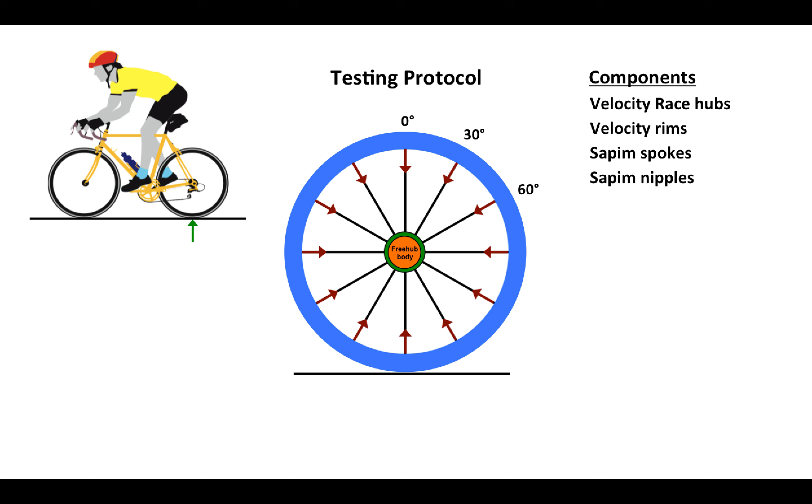On the left, you see a sample of a wheel. We're looking at the wheel on the drive side, and we have to have a way of referring to the positions of the spokes. Starting at the top of the wheel, which we will consider to be 0 degrees, then we can label every spoke every 30 degrees.

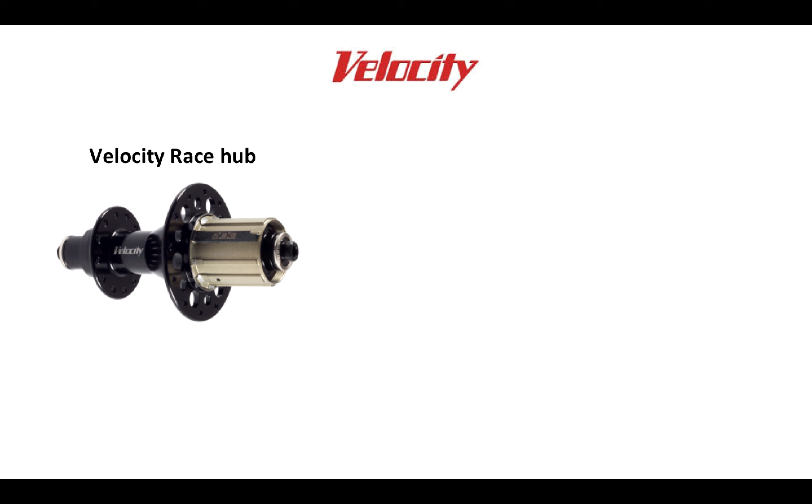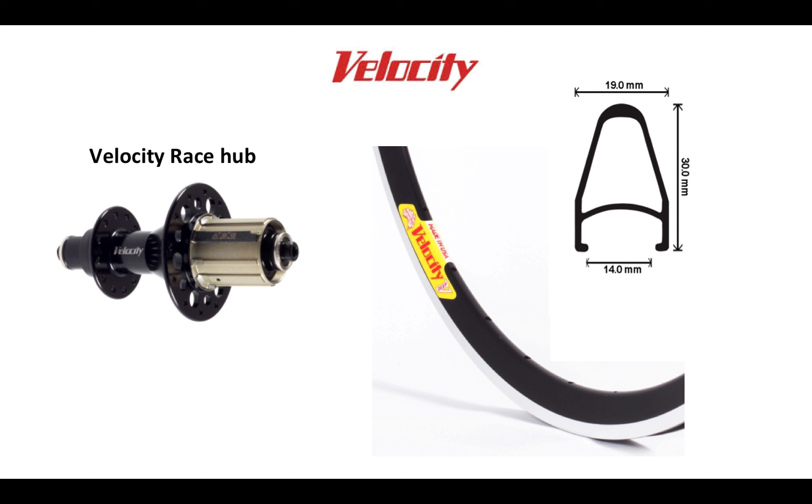Velocity was the sponsor for most of the experiments that we're doing with wheels, and I'm using the Velocity Race hubs for all of the wheels that we're going to experiment with. Many of them are also built with the Velocity Deep V rim, which is a very strong, venerable rim, and this is the extrusion.

Another sponsor was Sapim that made available to me a wide variety of spokes and nipples. And there's a lot to choose from. We're going to look at straight gauge spokes, butted spokes, double butted spokes, and aero spokes and see what's available.

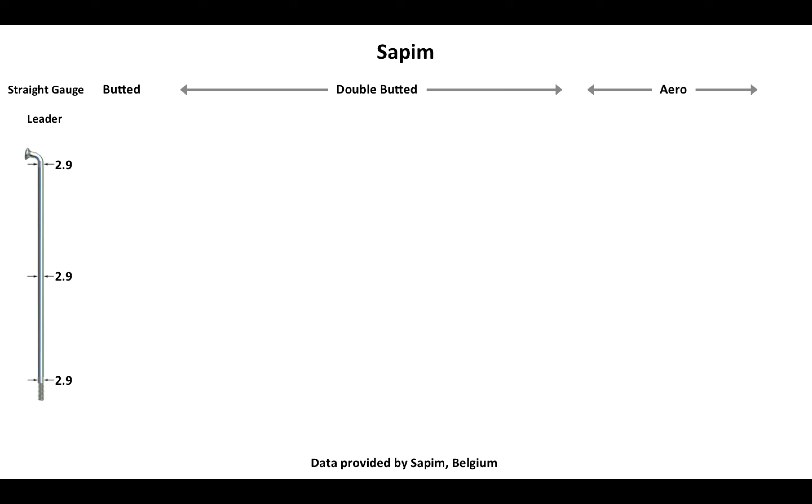First, the straight gauge leader spoke. It comes in 5 different actual diameters: a 1.8 millimeter, a 2, a 2.3, a 2.6, and a 2.9. The most popular of these is the straight gauge 2 millimeter spoke.

This is the butted spoke. It's called the Strong, 2.3 millimeters at the elbow, and then the rest of the spoke is 2 millimeters.

Then there are 5 spokes that are double butted, starting with the Force, which is actually a triple butted spoke. I'm not going to read all these numbers because you can see them. Starting with the Force, then we have the Race, the D-Light, Laser, and Super spoke.

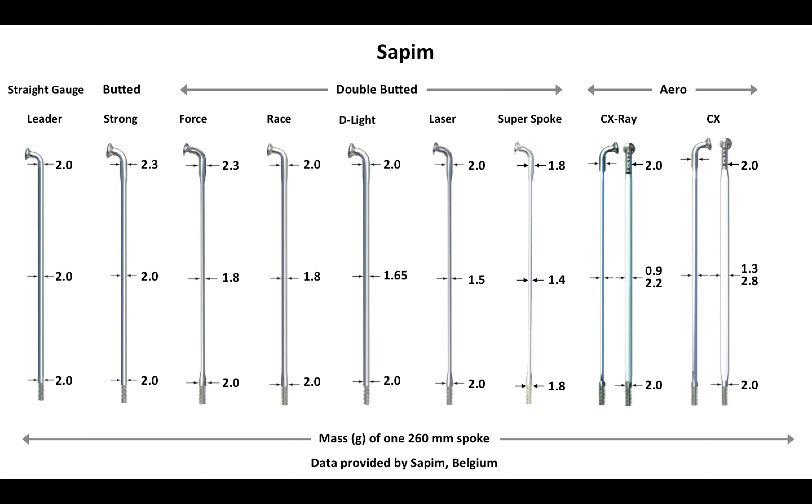Under aero, we have the very well-known CX-Ray spoke and the less-known CX. Now I'm going to give you the mass in grams of one spoke of each type at 260 millimeters starting on the left.

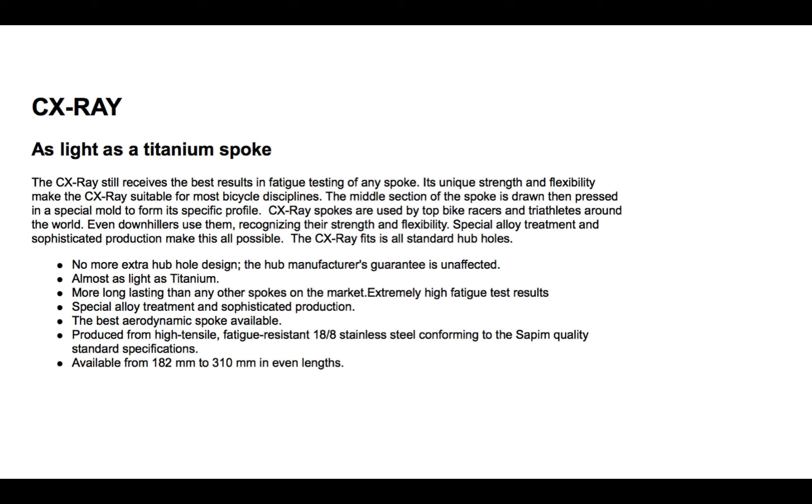Let's focus on the CX-Ray for a minute. You could look up this description on the website for Sapim. Here are some technical specifications, and there's the weight I mentioned to you a minute ago.

This is the type of stainless steel that's used in the spokes: 74% iron, 18% chromium, and 8% nickel. This is known in the industry as 18 and 8.

This line shows us the strength in the middle section, 1,600 newtons per square millimeter, and from that information I can calculate the tensile strength of the spoke. I need to calculate the cross-sectional area of the elliptical aero part of the spoke.

Here's my ellipse, and the dimensions that Sapim gives me tells me that I have a major axis of 2.2 millimeters and a minor axis of 0.9 millimeters. That gives me these half distances. Side A, or line A, is 1.1 millimeters, B is 0.45 millimeters.

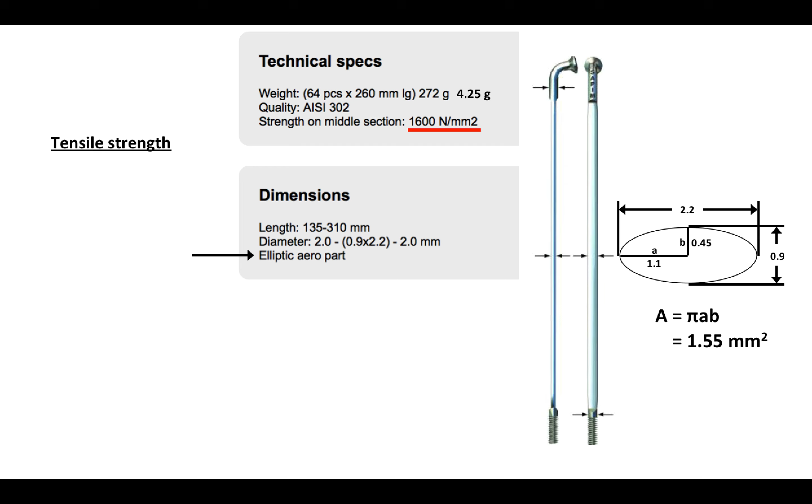This is the formula for the area of an ellipse, and when I calculate that out, I get 1.55 square millimeters.

So my tensile strength is 1,600 newtons per square millimeter times 1.55 square millimeters. That gives me 2,480 newtons, which is about 546 pounds. So if I imagine that I have a ceiling and I have a spoke, a CX-Ray spoke attached to the ceiling, then I could hang from that spoke a barbell of 546 pounds, and that is the tensile strength of the spoke.

I've known about the tensile strength of this spoke for a long time, which led me a few years ago to perform the Sapim CX-Ray death-defying demonstration.

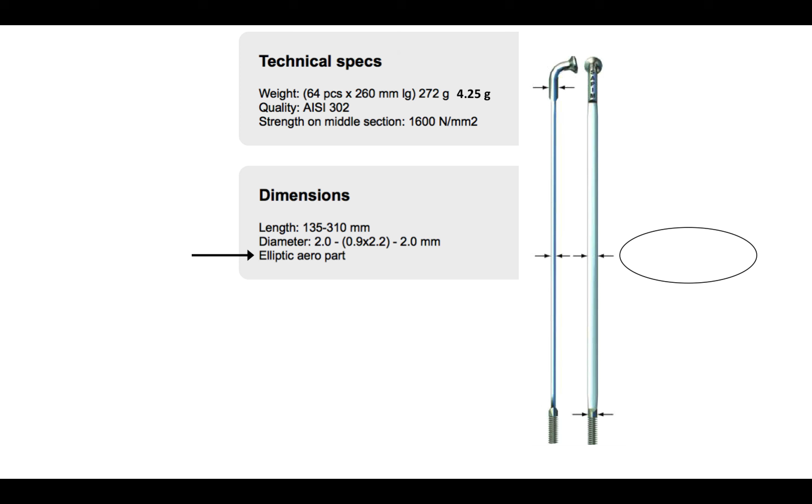While we're on the topic of the CX-Ray spoke, I want to give you a peek into something we'll discuss in greater detail in the chapter on aerodynamics. The elliptical shape is very favorable from an aerodynamics standpoint, and sometimes other spokes are referred to as bladed spokes, but bladed can sometimes mean rectangular in cross-section.

These are the variables in the wheels that we will study: the rim extrusion, the hole drilling, lacing pattern, spoke thickness, and spoke tension.

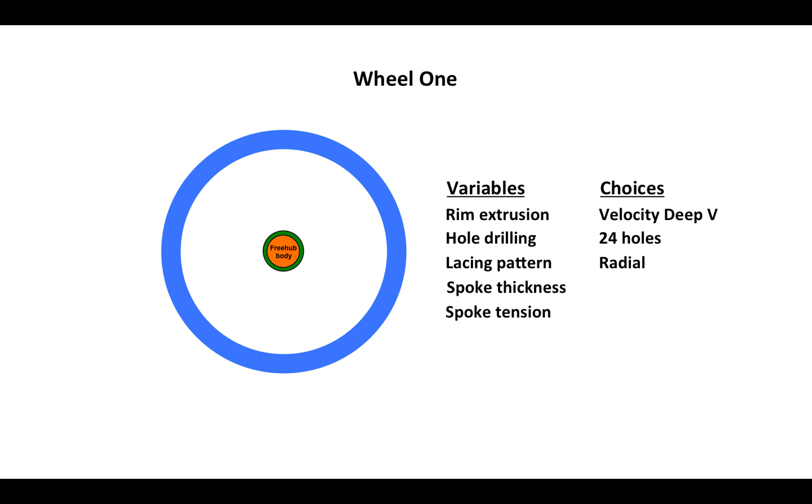There are 11 different test wheels using these variables, one of which actually has a carbon fiber composite material in the rim. This will be wheel number 1. The choices are to use a Velocity Deep V rim, 24 holes, and radial lacing. Radial lacing is what I'll use for many wheels because with radial lacing, the spokes are pretty well isolated, making a good model for studying changes in tension in the wheel.

Here we see the 12 radial spokes on the drive side, which is the load-carrying side to a great extent, and here we have 12 on the non-drive side. We have to have the non-drive side as well, but I'm going to focus my attention on measuring the drive side, so let's disregard the 12 on the non-drive side.

We'll have, to start with, straight gauge spokes, 2mm, that's the leader, and 80 kilograms of force, or 784 newtons, which I think is about the minimum you can have to have a reasonably stable and strong wheel.

Wheel 2 will be the same, except we will use Sapim Race spokes, which are 2mm thick at the ends and narrowed down to 1.8mm in the long midsection.

Wheel 3 will once again be the same, except here we will have Sapim Laser spokes, which are 2mm thick at the ends and 1.5mm in the long midsection.

Wheel 4 will be the same as wheel 1, except we will raise the tension on the drive side spokes up to 130 kilograms of force, or 1,274 newtons.

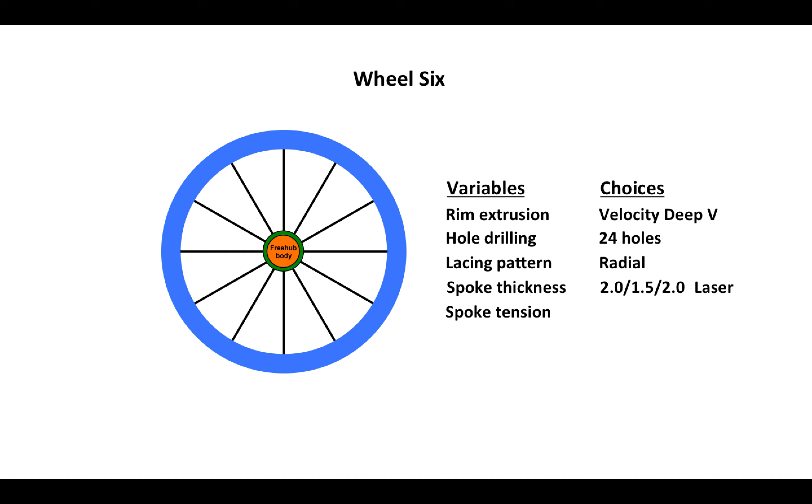Wheel 5 is like wheel 2, except at higher tension. And wheel 6 is like wheel 3, except once again at the higher tension.

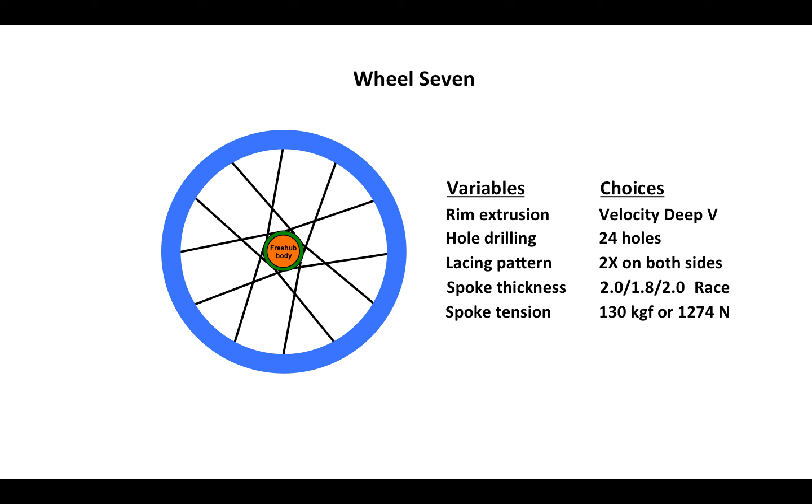Then we'll start looking at some wheels that have a crossing pattern. This will be wheel 7, using the variables and choices shown on the right.

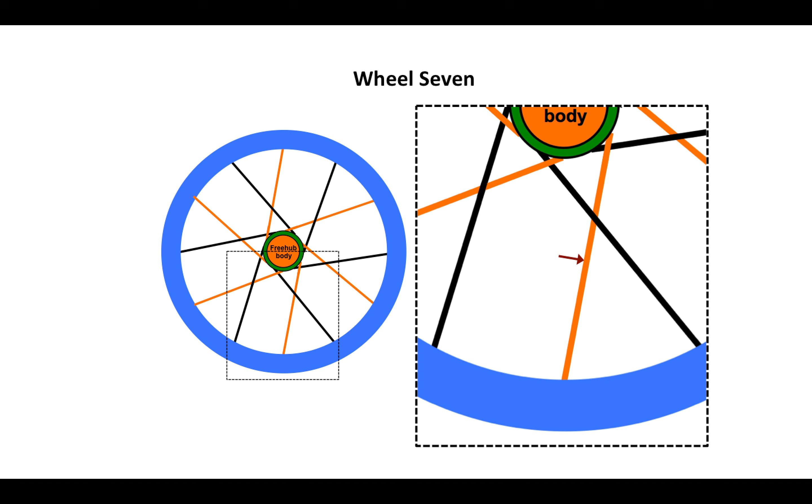We don't actually know yet if that's true, but it seems reasonable, so we can form that hypothesis. I'm interested in learning how much that spoke will be dampened and the variation in tension narrowed in a crossing pattern, compared to the same situation with radial spoking.

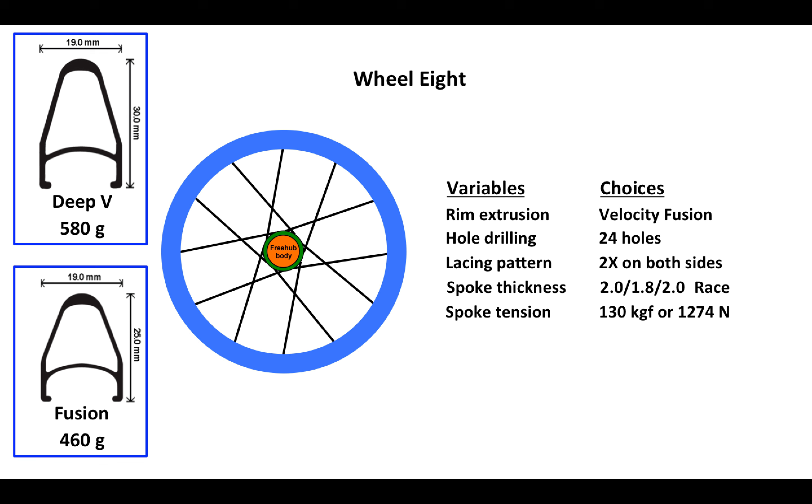Wheel 8 is like wheel 7, except here we're going to use a Velocity Fusion rim and see how the Fusion extrusion compares, if at all, to the Deep V. Both rims have the same outside width of 19 millimeters, and a depth of 30 millimeters for the Deep V and 25 millimeters for the Fusion.

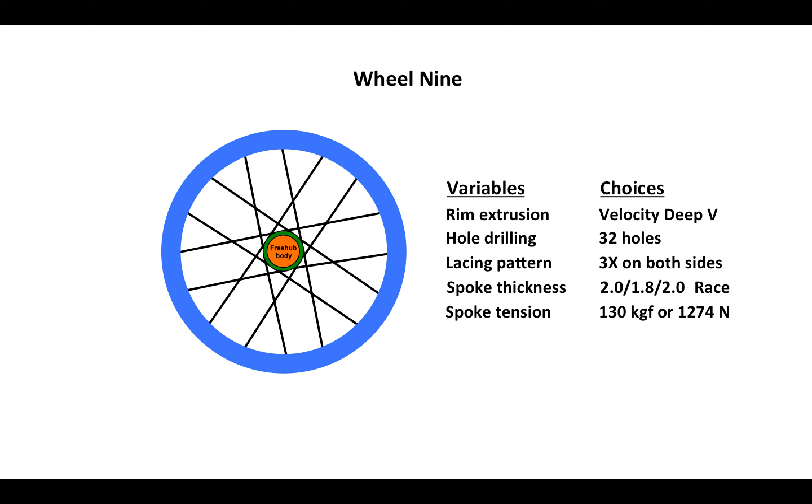In wheel 9, we're back to the Deep V, but now we're going to use 32 holes and a 3-cross pattern on both sides.

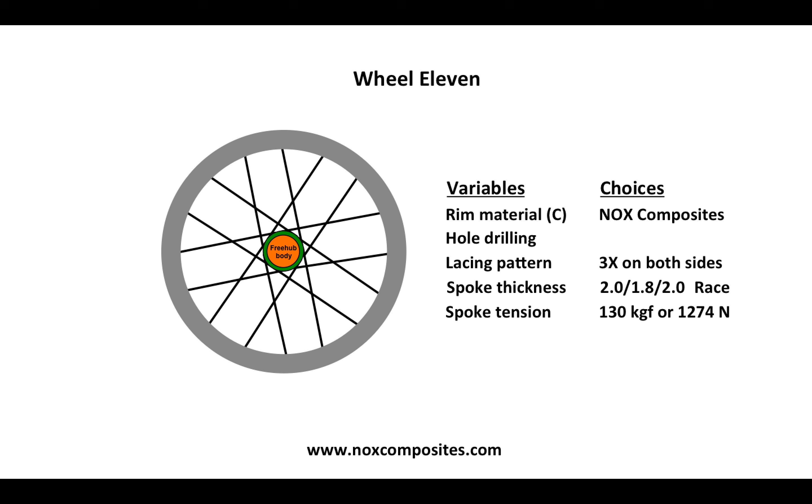Wheel 10 is again the fusion rim, 32 holes, 3-cross on both sides. Wheel 11 is going to use a rim made out of carbon fiber by NOX Composites. It's going to be 32 holes and 3-cross, and the model of rim is a Teocalli 29.

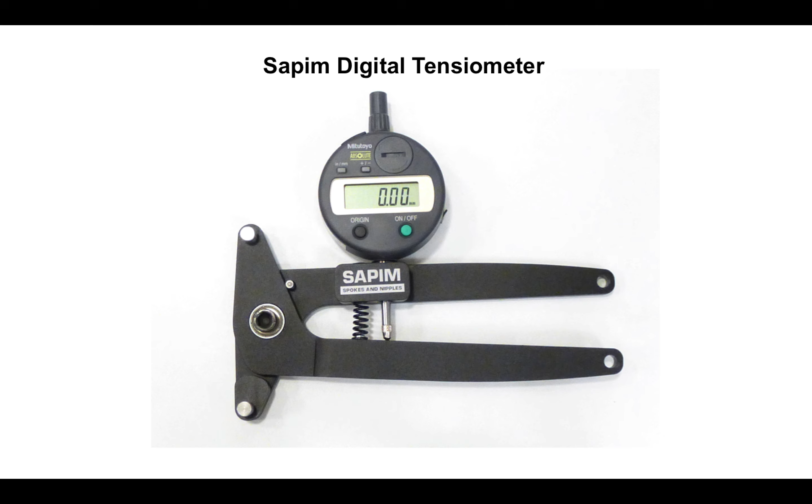This is my most accurate tensiometer, and it's calibrated specifically for Sapim spokes, and I've used it over 4,000 times in making the measurements that you'll see coming up.

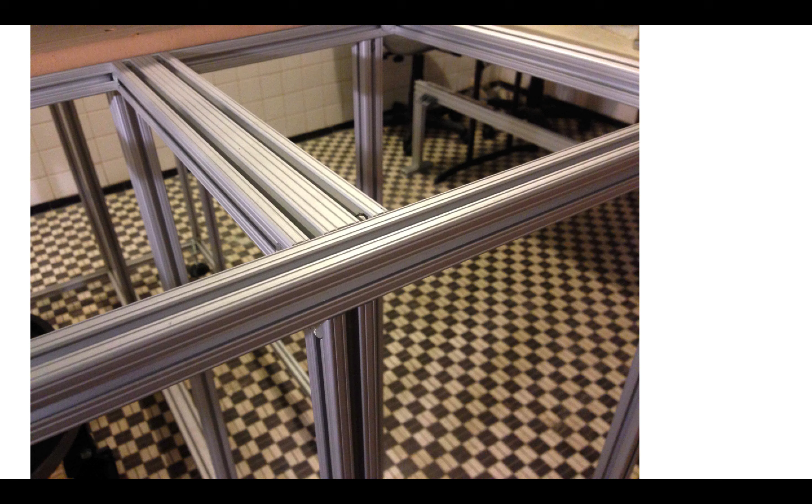This is the apparatus all set up in my test lab, and I'm going to walk you through this and show you how it works. The table itself is made up of a massive amount of extruded aluminum, all braced and connected together for support.

Special connectors effectively attach the pieces together, but are easily loosened so that the apparatus can be dismantled and moved if necessary. The table itself is supported by 8 feet, 4 massive ones in the intersection, which is supporting the bulk of the weight, and then 4 more on the outer corners. All 8 of these are adjustable so that the table can be perfectly leveled.

This is Carlos Alfaro, a friend of mine and a computer scientist. He developed a spreadsheet and recorded all the data as I read it off, one of several thousand readings taken here by me and recorded by Carlos.

I want to use my movie camera to show you this apparatus because it's turned out to be a perfect setup for measuring spoke tension.

The wheel, as you can see, is resting on a treadmill, so I can change the position of the wheel by rotating it, just turning the pulley here on the treadmill, and I don't have to do anything. I don't have to lift up the wheel at all. So this has proved to be very, very useful, to be able to position the wheel exactly without having to change anything else.

I installed an external cup on the bottom bracket shell, which allows a 3/4 inch threaded rod to go through the bottom bracket, and it turned out to be a very good fit.

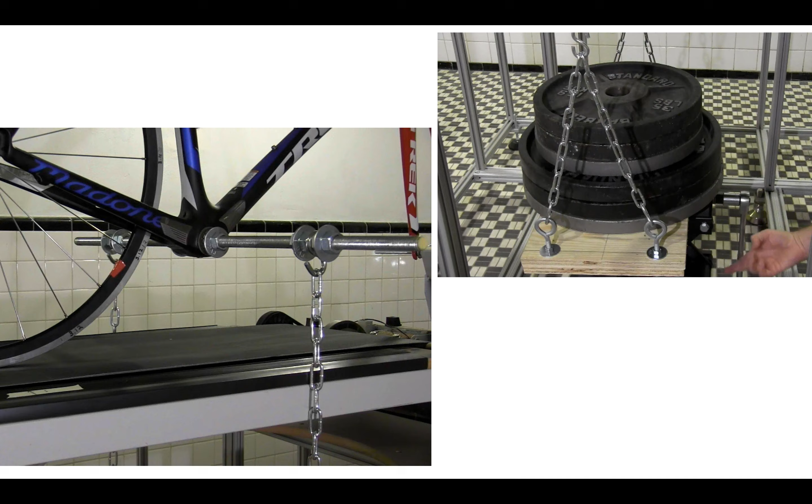But as I lower this jack, which is supporting the weight, then we see that the weight is slowly transferred to the wheel, and at some point the swing is just swinging freely, which means that all of the weight has been transferred to the bike.

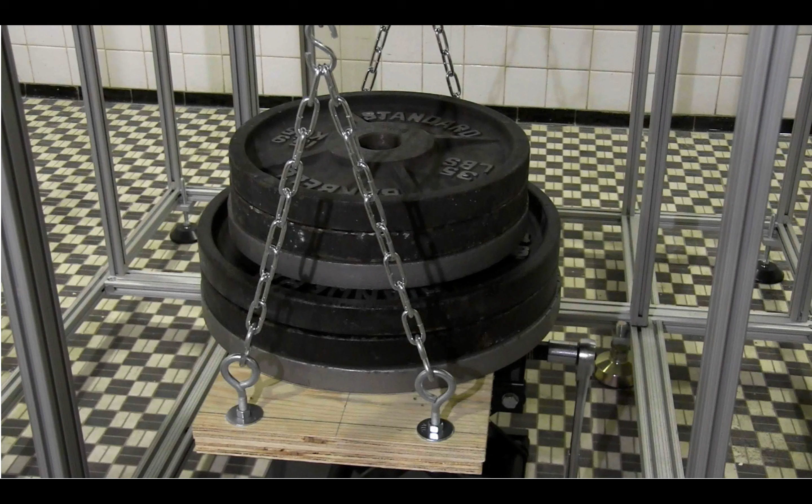I now have a 240-pound load on the bike. Of that 240 pounds, about 153 pounds, or about 2/3 of the total, is on the rear wheel.

Even with that full 240 pounds applied to the bottom bracket through these chains, I can still rotate the wheel quite easily with the pulley, without having to take the weight off the wheel every time I want to move the position of it.

To perform tests on a different wheel, all I have to do is raise the jack, switch the wheels, and then lower the weights again.

And here's how we'll do the actual tension measurements. We'll take an unloaded wheel, and in this case here, this happens to be a 24-spoke wheel, so we're looking at the 12 spokes on the drive side, and at every 30 degrees there is a spoke, and we will measure the tension of each of those 12 spokes and calculate an average.

Then we will put the wheel under a vertical load and once again measure the tension of each spoke at each 30-degree point. Then using the treadmill, we'll rotate the wheel 30 degrees and measure every spoke in the loaded wheel again. Rotate another 30 degrees and measure again. And again.

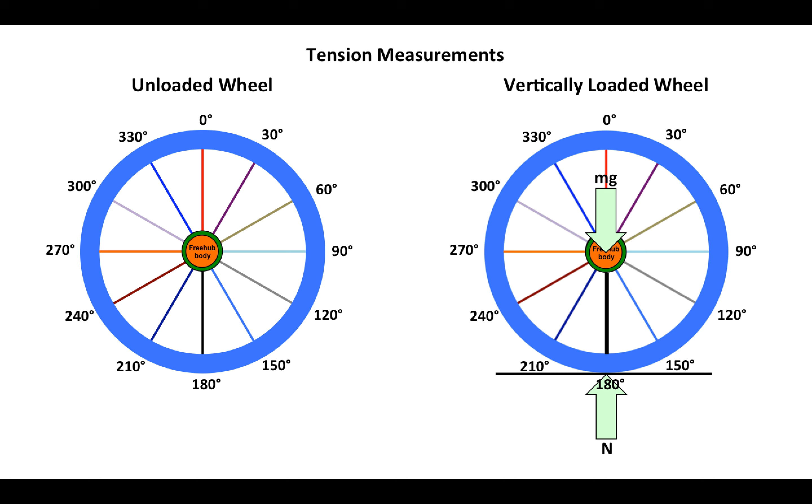Until I get back to where I started, so that by this time I will have an average tension at each of those 30-degree points, representing the average of 12 different measurements every 30 degrees. And by doing that, I am averaging out any possible inconsistencies that I get in my tension measurements. And that should give me some good data.

I'm not worried about the consistency of the tension of the unloaded wheel, because I can do that on the truing stand and make sure that by balancing out the tension carefully, all of those spokes on the drive side are at exactly the same starting tension.